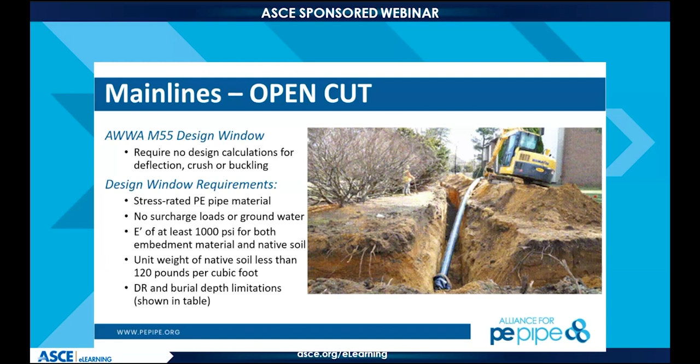So while some may think that this is not a safe way to install the pipe, it really is. There's a bedding. They'll come back through and backfill and compact that material with natural native backfill in this particular scenario as we go through.

Here, another way to install HDPE is with horizontal directional drill, which is quite oftentimes the municipalities' first introduction to HDPE, if they haven't used it before. They are continuing to push the boundaries quite a bit for HDD. We're seeing very long runs of very large pipe that are going in to be installed via horizontal directional drill. So some of the things that we're looking for is not exceeding the tensile yield force of that HDPE when we are installing it.

So we want to know about the friction forces and all those that are happening during that horizontal directional drill process. Earlier this year, we did do quite extensive discussion on horizontal directional drill and trenchless technologies in general. So definitely look at some of the Alliance's previous webinars in order to beef up on that information itself.

Another way that HDPE is often installed is through pipe bursting. Pipe bursting is a trenchless technology, and three things are happening at the same time: we're fracturing that existing pipeline, we're pushing a temporary soil cavity through with an expander head, creating space for that HDPE pipeline to come in and follow suit. So this is a trenchless rehabilitation method, and we will replace that existing pipe through this pipe bursting process.

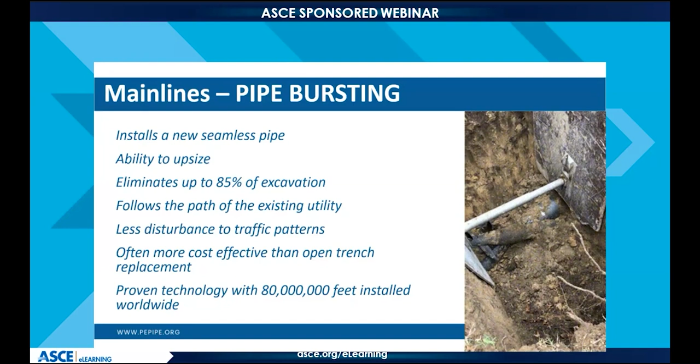Yeah, that was in Miami, just north of the airport. This was a sewer rehabilitation where they were leaching fairly excessive sewer into their ground. It was about 200 or 350 feet of pipe. They've been doing sections like that, 350 to 800.

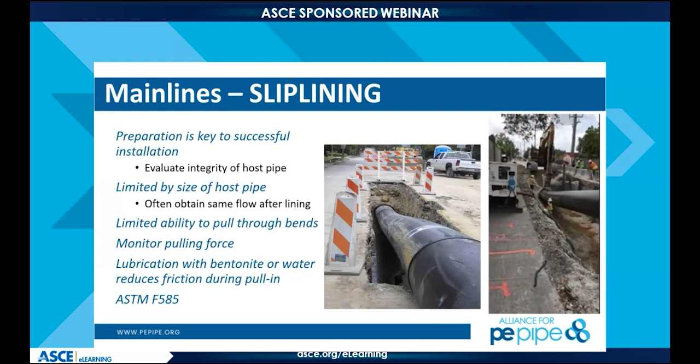It was really good. That long longitudinal run that we're looking at allows us to fuse a lot of pipe material in advance. We're getting a fairly good hydraulic improvement just from the smoothness of the HDPE pipe as we're coming through and putting that in. So in some cases, you don't necessarily need to go bigger if we're smoother on the interior of the wall as it goes through.

That relaxation period that we're looking at occurs in the first 24 hours as that pipe is allowed to relax and settle. Most of the relaxation will be in that 2-hour time period, but before you make any connections, we want you to let it be for a good solid 24 hours.

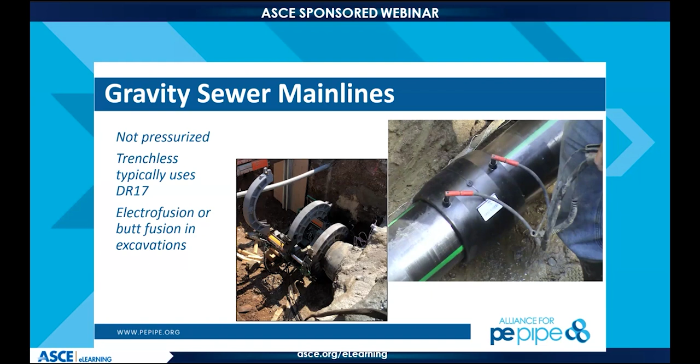So some things that are unique to gravity sewer main lines, a lot of times they'll use DR17 to install this. Of course, they're not pressurized force mains that convey material from a pump station to another location. HDPE is definitely a good product for these types of scenarios, as we're looking at trying to resist that hydrogen sulfide that is often released when we agitate that raw sewage.

So here's a project we just wanted to talk about fairly quickly, where HDPE came in and saved the day quite a bit. There was pipe failure in the Intracoastal Waterway in Fort Lauderdale. Since that was the single pipe crossing that Intracoastal Waterway, they had no other avenue to get the raw sewage across that waterway. So they were using 2,000-gallon capacity pump trucks, vacuum trucks, to take it from one side of the Intracoastal to the other.

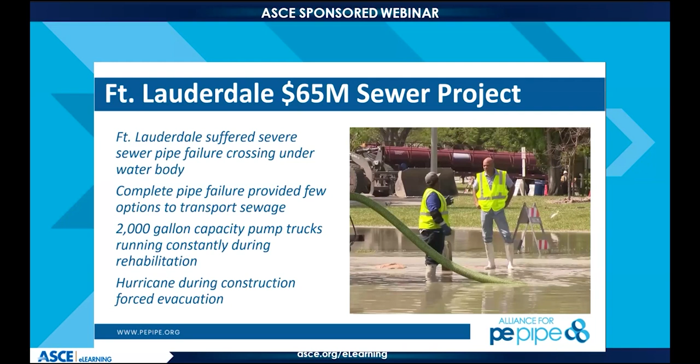This project itself used a design build process in order to expedite contractors to come through and use a myriad of trenchless technology methods to install new pipe and rehabilitate existing pipe in some scenarios. So HDPE was very good for this process, and it was definitely a rugged and durable pipe for what we're looking at.

So inflow and infiltration oftentimes plagues that gravity sewer, and this happens to be an opening within the gravity sewer system, either through broken joints or direct connection between the rainfall event and the gravity sewer, and it'll lead to capacity reductions, and that inflow and infiltration will take over valuable hydraulic capacity within the pipe itself.

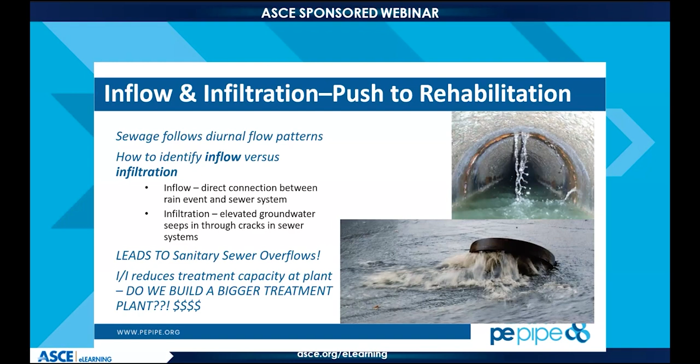These SSOs, sanitary sewer overflows, lead to consent decrees in many instances, which is a judicial order. That municipality has to go through and actually try to fix their system up in that scenario. So there are ways that we can look at our pump stations in combination with rainfall events to see if we have a closed system or if we are getting some of that inflow and infiltration.

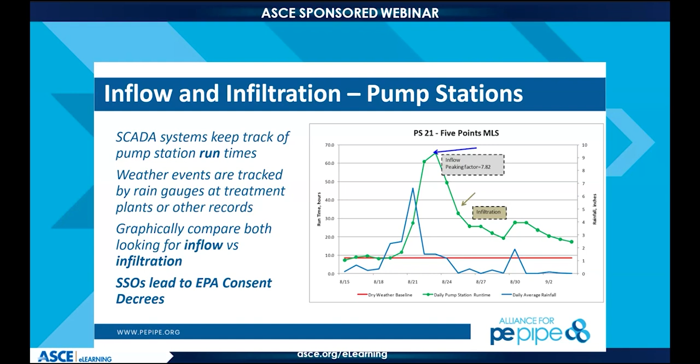So sometimes they simply put door hangers and have an outage period when they're performing the pipe bursting work, and it allows for you to be able to just bypass that one.

Yes, Pete. So we just had a great question, Alan, about whether or not you can pipe burst HDPE. You know, polyethylene is not fracturable, yet the city of Houston does a lot of it. Could you tell us whether or not we can pipe burst HDPE and what we need to look out for?

Yeah, absolutely. So you can pipe burst HDPE through a static pipe bursting process and a cutting head that comes through and simply cuts that HDPE, and then the expander head will push that apart as well. That's static pipe bursting. That's just a different type of pipe bursting, and how it applies the force necessary for the pipe bursting process. There's a hydraulic power pack, and that pushes the force, the brute force, across a series of rods or cable to that expander head as it advances and pulls through.

Pneumatic pipe bursting only uses HDPE as a replacement pipe method because it uses an impact hammer driven by compressed air and inches along with the existing pipe. It is aligned with the existing pipe through a constant tension winch that pulls that expander head through.

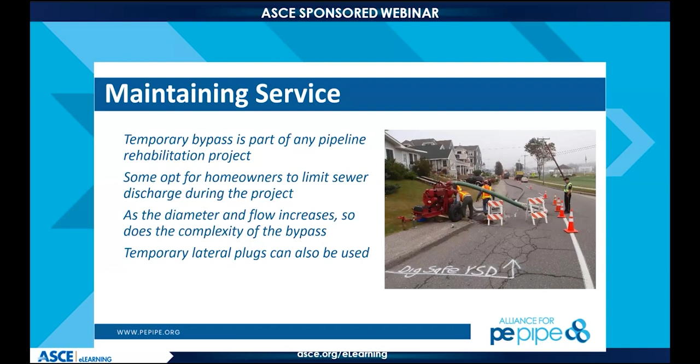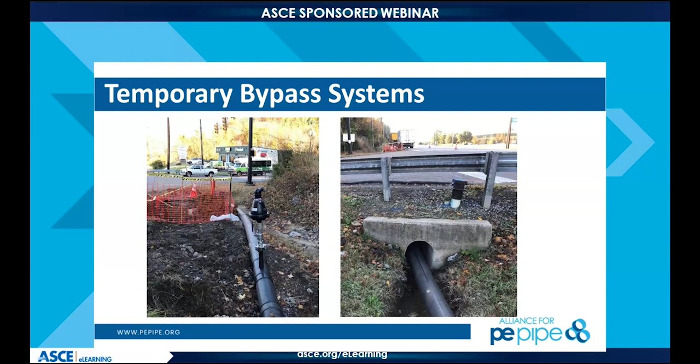Here's a very good example that I like to use of temporary bypass for the city of Baltimore. They were rehabbing the 78-inch combined sewer. So that has stormwater and gravity sewer in it quite a bit. So a lot of capacity through this pipeline, this 78-inch pre-stressed concrete cylinder pipe, and it was rehabilitated using cured in place pipe and carbon fiber reinforced polymer.

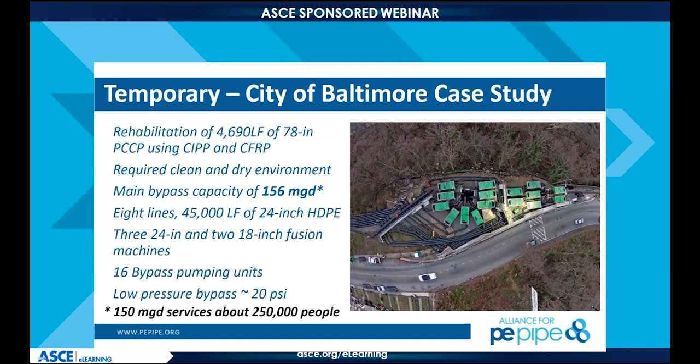Now, in order to be able to make the temporary bypass work for a pipe of that size, you needed 45,000 linear feet of 24-inch, and then lots of fusion machines, 16 bypass pumping units, and a lot of different parts and pieces to be able to get all of that to work. So HDPE is very often used for the very difficult stuff, and we're going to encourage you to use it for the easy stuff too.

So with manholes, there's lots of different ways to connect to that HDPE manhole. If you do have an HDPE manhole, they'll have a stub out on the bottom section of it where you're going to either electrofuse coupler, or you're going to butt fuse right to that stub out. For manholes that are not high density polyethylene, and we're connecting to it, if you're pipe bursting, you'd allow the pipe to relax before making that final connection. And then you would put some type of grout around that existing concrete or brick manhole to be able to make that connection.

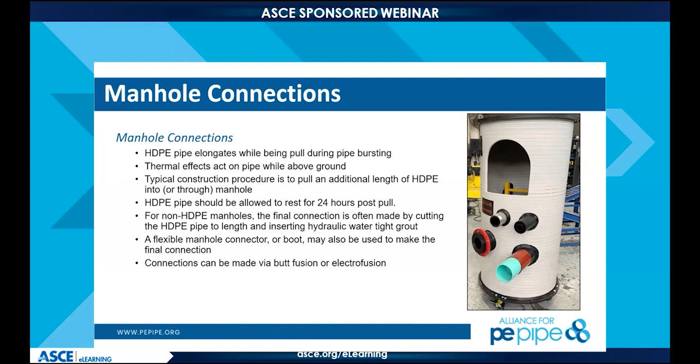But very often we do see HDPE manholes in very corrosive soil environments because it is corrosion resistant in that manner. So that manhole is necessary for cleaning and inspecting all the main lines as we come through. It gives us a chance to clean, jet any buildup or other debris within the pipeline, and then also inspect that pipeline afterwards. So here's just a couple more examples of an HDPE manhole.

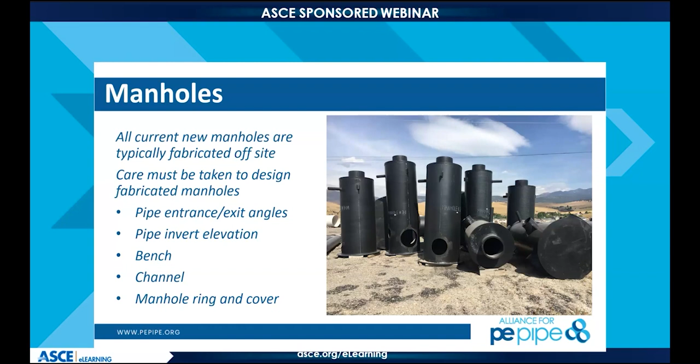So much like your precast concrete manhole, if you're putting a new one in, we want to know what the invert elevations are and directions, and you would tell your fabrication facility that information, and they'd fabricate this fitting for you in their yard. So Rusty and his crew have the capability to be able to do that for you.

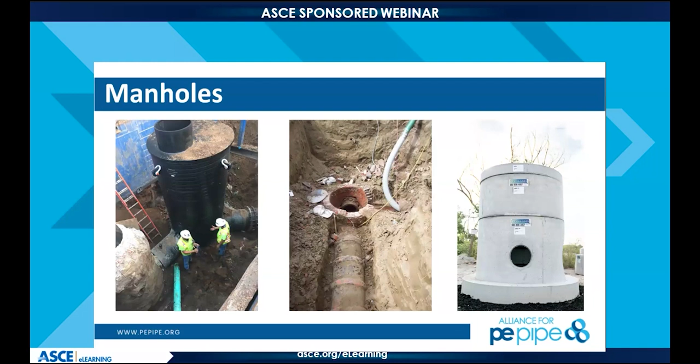So here's some examples of those installed manholes. The one on the left is in Beaufort Jasper in South Carolina. So they went with all HDPE manholes in order to be able to resist their soil with extreme corrosivity. So some of the things that the HDPE will help with is getting rid of that hydrogen sulfide, or rather being resistant to it.

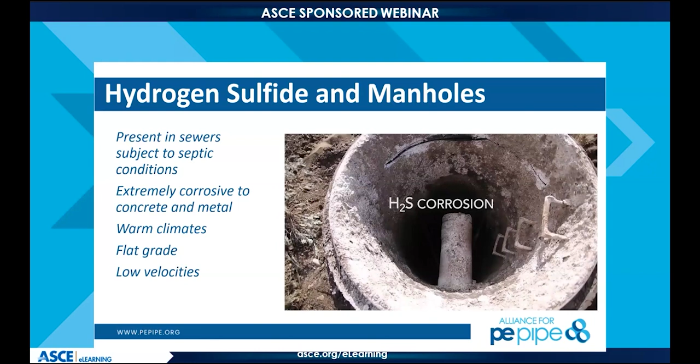And what you'll see here right in the middle is that concrete being eaten away directly by hydrogen sulfide as we come through. All right. Talking a little bit more here about air release valves, as we did before as well. That air release valve happens to be at a high point along the line where that gas is going to accumulate. And when we use an air release valve to let that out, then we're able to make sure that hydraulic capacity is not limited.

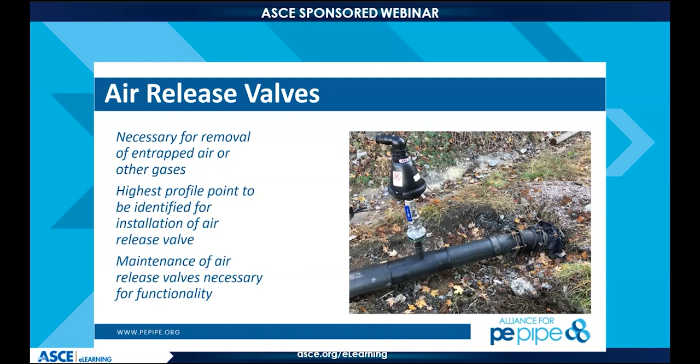Sorry, the Beaufort Jasper is in South Carolina, not Georgia. Thank you very much, Pete, for keeping me up to date here.

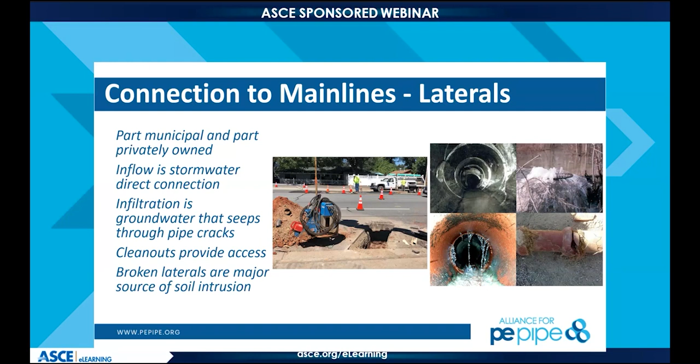So connection to the main lines, we're looking at laterals as well, and you can pipe burst some of those laterals, which you'll see here in the middle happens to be a small lateral bursting machine. If you've ever seen the Alliance at a trade show, sometimes we do bring pipe bursting to the trade show floor, and we use a lateral bursting rig like this. And just the same way that you burst those main lines, we can burst that lateral and bring back that high density polyethylene that we really like to see in that manner as well.

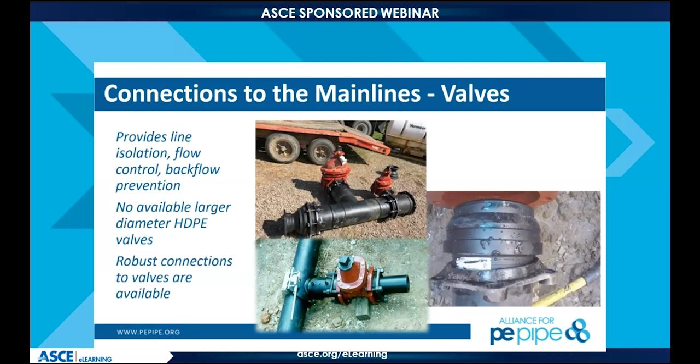Last but not least, that bottom picture is an electrofusion saddle that's connected to the mainline HDPE, and then it's with an electrofusion coupling. The MJ adapter is put on to transition to the gate valve there, and you can see in the video that's just a standard legacy mechanical joint MJ valve that all water systems have in their system.

Just showing you how we connect, and basically it works similar to, for those of you who know, a hydrant T or a swivel T in the ductile iron business. This is just a polyethylene version of that. So literally those bolts would all have to break for that joint to ever come apart. So it's really the Cadillac or Mercedes of connecting to other piping systems.

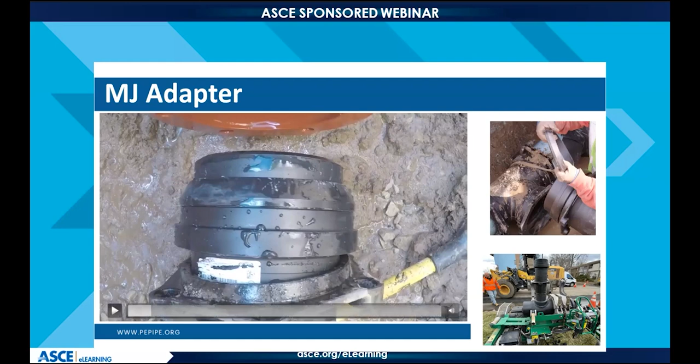So Steve, do you sell these mechanical joint adapters as kits or individual pieces? How does that process take place? We sell them as kits, but there's so many different options. I think this example shows the blue bolts, which are more and more common. Those are becoming kind of the leading spec. Bolts used to be just Corten steel. We still sell some of those.

These bolts are a little longer than your typical T-head bolts for a standard MJ fitting. So yeah, we mate those with the gland, so we get them the right length and the right material. Some specs ask for stainless steel. Personally, I like the blue bolts. I think they're the best for this particular option. But yeah, we sell those as kits.

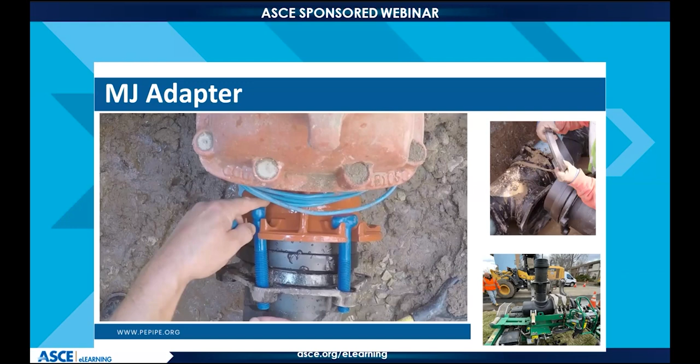Awesome. So the image in the upper right, the most popular video we have on YouTube is that 2-minute video that shows how to install an MJ. One thing I've learned, Steve, is up in Canada, the Megalug is still the standard that everybody uses. But we're starting to see more and more MJs making it up to these recalcitrant parts of the United States and Canada. But Megalugs work too, don't they?

They do. And the only thing I have against a Megalug, I guess, is that it opens it up to installation error, right? Is the individual that's tightening those bolts doing it properly? Is there anybody watching to make sure he's doing it properly? In this case, with the MJ adapter, I think the big advantage is that if that doesn't leak, then they installed it right. Yeah, for sure, kind of at leak test. But with a Megalug, you have to have a stainless steel stiffener inside it to resist the forces of the lugs as they're being tightened. And so there's just quite a few variables there.

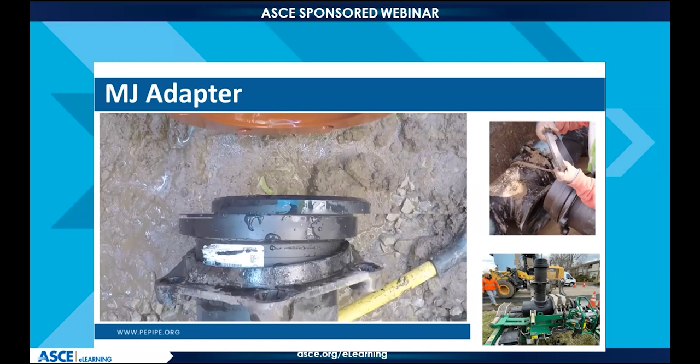If it's done right, it's a great joint for sure. So unique to both of those, the MJ adapter brings all of the force longitudinally through that fitting in its robust nature. The megalug then has force on the outside of the pipe laterally, so that way it squeezes on that stainless steel insert, and that's unique to each of the fittings. But they certainly both will work, and they have for quite some time.

So what are we looking at here, Steve? We're looking at, I think this brand is, an AVK gate valve. So this is a standard AWWA C509 gate valve with a different end. So, gate valves, they're the ones with the rubber wedge. They're the standard in the industry that every town in America uses. The most common one for a buried valve is an MJ valve, which are the ones we saw before. But AVK came up with this very unique connection specifically for HDPE.

And so they made the bottom of that valve, instead of a female end that is shaped like a mechanical joint with the bolt holes, they made it with a male end, and that's a barb fitting. And I love this video because it shows you how flexible and durable HDPE pipe is. So just with a whole lot of force, they're literally pushing the pipe over that barbed fitting. And then, as you can see in the right-hand picture in the lower corner, there's a stainless steel retainer ring that's then shoved over the top of the polyethylene pipe to lock it onto the valve.

So that valve is then wrapped in, I forget the name of that wrap, but so it doesn't corrode. So you've eliminated the bolts, and you've fused this valve into your system. So you've gotten rid of all the corrosion points because that valve is epoxy coated, and in this case, the stem is stainless steel. So the fittings portion of the HDPE industry has developed a lot of these types of products to really just make it so much easier for everybody out in the field to use that high density polyethylene.

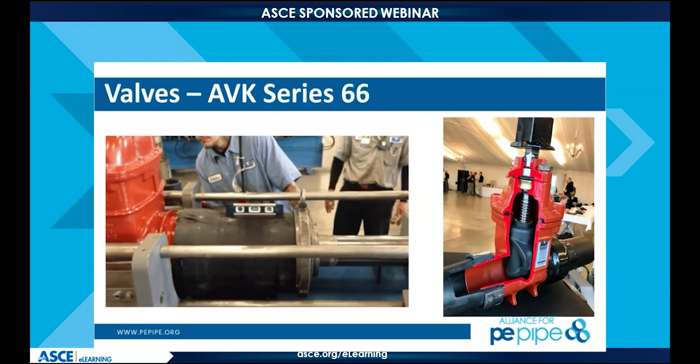It's also important to note that the two pipe materials have very, very different temperatures at which they're brittle, and that ruggedness and durability of HDPE to work with in the field is one of those real saving graces for us. So I'm going to keep going.

Fire hydrants provide a lot of different uses within the system itself. We can use them to flush out poor water quality, either through a reactive flushing program or a unidirectional flushing program, in which case we're going to look to directionalize those impurities or whatever is contaminating the water supply, such as old water, iron, or other things like that that get in there.

So we can use it also for pressure monitoring or temporary water for construction. And here's just a few examples of those as well. That AVK valve also has a stub out for a fire hydrant that we'll be looking at as well. So lots of good uses besides just firefighting. You can control and learn about your operation of your system in that way.

So tapping the main is what we're here for, really to talk quite a bit about the service connections when we get to it. Here's some examples of tapping a main that is not live. There's a big difference between hot tapping, which is there's water flow within that potable water main as we get through there. And we'll show you later on some examples of fittings that can be used to do that tap.

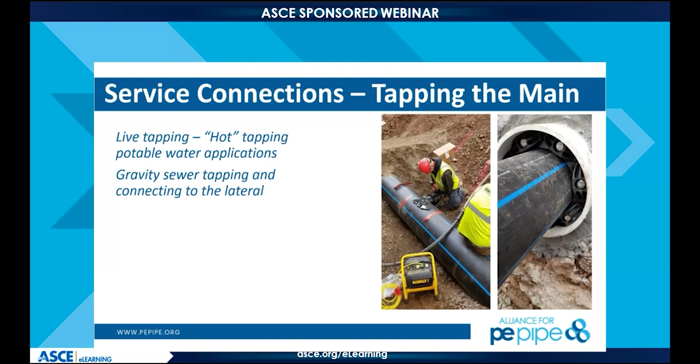So here they're making a larger fitting onto the side of the pipe and then prepping this service connection, larger diameter, that goes into a larger building in Minnesota. And then others for gravity sewers as well. So here we're looking at small to medium-sized services, metered usage.

So there'll be a corporation valve that allows you to shut off that lateral or service connection as we come through. It is there sometimes to prevent that cross-contamination through that line as well, and compression fittings can be used for those smaller service lines. So here's some examples of corporation valves.

So unique to HDPE, you can't put the threaded connection in directly to the HDPE. It has to be done through a fitting, and we've got plenty of fittings that'll accomplish this for you. The taper pattern on some of these different corporation valves varies fairly significantly. So there are multiple different types of fittings with a different taper on the end of that ball valve that you want to make sure that you're getting for the right use in your system. It varies across the country from place to place.

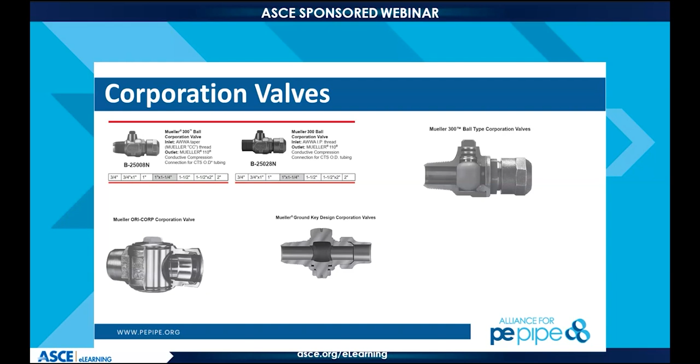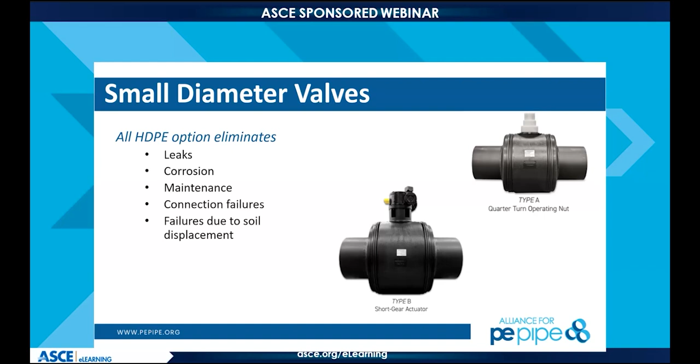So here are small diameter valves that are made of high density polyethylene with some polypropylene elements inside of them. But you're going to see that these are all corrosion resistant, leak free. In some instances, we can just simply butt fuse that right to the service connection as well. So we like to be polyethylene from point A to point B. It's a monolithic, fully restrained system, but we do recognize sometimes brass fittings are necessary, and that's what you're more familiar with.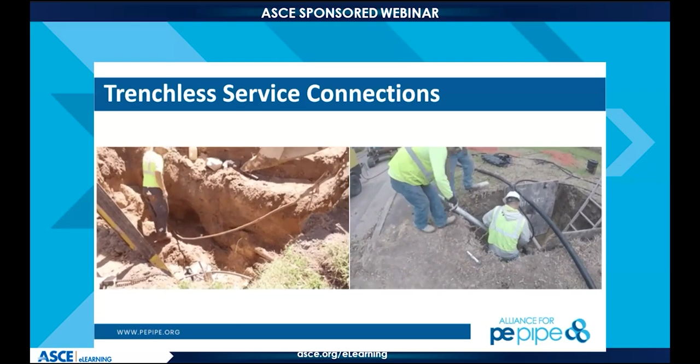Here's some trenchless service connection installations. What you're seeing on the left happens to be an existing copper service, and they simply attached the high density polyethylene on the other side, and are using brute force to pull it out. What you're seeing on the right is a pneumatic insertion tool which they'll line up to cross that road for a long side service connection in this scenario. So that is a trenchless installation tool. It is not an intelligent tool, so you can't directionalize it, but if you get it in the right direction, you can have that set up in there.

So Steve, you want to come on and tell us a little bit more about what we're looking for in service connections, and share some of your history and the things that you've done in the field? Yeah, so what you're seeing here is quite a few different options of service saddles. The one you see there, kind of in the middle with the corp stop threaded into it and the brass threads, that's an electrofusion saddle that's just electrofused to the outside of the pipe. And then the threads are AWWA threads, so they mate with that corp stop, and that's very similar to every other service saddle that exists on any other kind of water main.

So sometimes today in ductile iron communities, they still tap directly into the wall of the ductile iron, but many municipalities have gone to mechanical service saddles, which we'll show in a minute. But kind of the evolution from that one with the brass corp stop in it is the one just below it, which is also an electrofusion tap saddle, but it has the cutter built into it, so you don't need a tap machine. That's why they call it a tap saddle. It's a built-in tapping machine, built into the saddle. And there are literally millions of those in the ground in the industry, in gas systems. So we just took a product that's been put in the ground since the 1980s in gas systems and copied it.

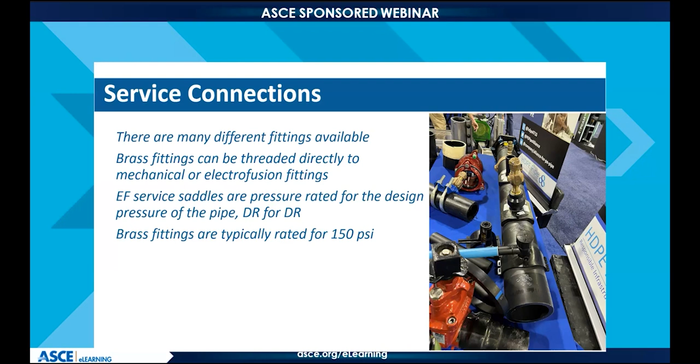Our manufacturers just do the same fitting, but do it in black HDPE for waterworks applications. There's again a corp stop into an electrofusion saddle. In this case, if that was a live tap, you would have to hook your tap machine, like you do traditionally with PVC and ductile, to the back of that corp stop. You would open up that valve.

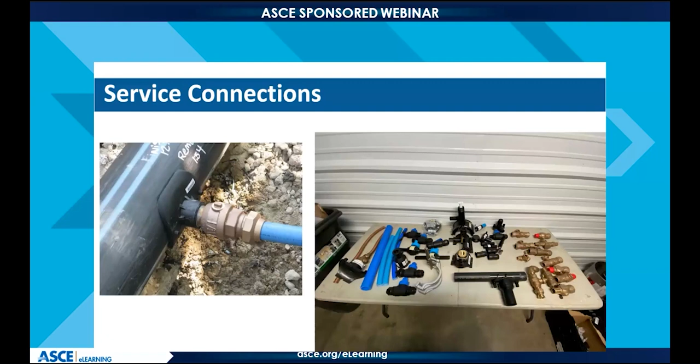The cutter head would go through the corporation stop, cut the hole in the main, and then you would back your tapping tool out of that corp stop, shut it off, and then you would attach what looks like polyethylene service tubing that goes on to the house. Or in this case, it looks a little larger, probably a commercial building.

Yeah, so thank you for that, Steve. Now we're going to cut to a little more detailed conversation of that with a live presentation by Alan in our studio, where he's going to talk through best practice connections to the main.

Alan, take it away. Hey there, can everybody hear me all right out there?

Perfect. So we have a great service display for you here. What we're trying to accomplish here is like what we would do in a road show, where we bring 10,000 pounds worth of gear to wherever your location is, and then you can touch and feel it and see all the parts and pieces.

So we did a myriad of different ways to connect to the main, including on this side a flange adapter that would connect to some of those valves or change in material types, and an MJ on the other side. So this is a self-tapping electrofused saddle. The bottom part of it only straps on while we're fusing it, but you'd fuse this directly onto the HDPE.

And now this is one of those that I was talking about, this live tapping. If you can see this, you could see the cross section of the cutter that goes through. And as we operate this, that cutter will go down and cut to the outside of the high density polyethylene and hold that coupon for us back in through this apparatus.

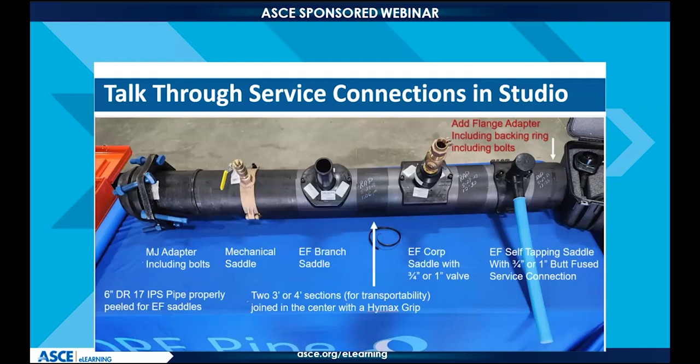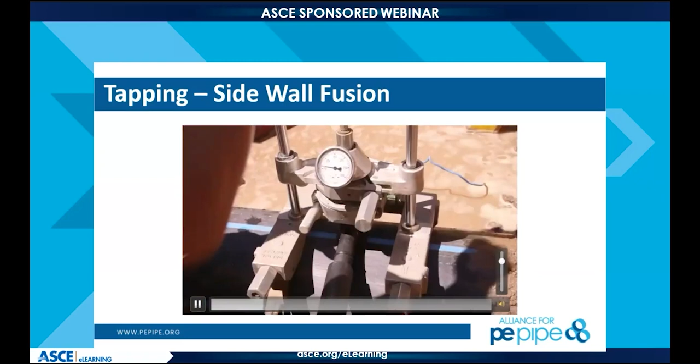One of the questions we just got, Alan, was: is sidewall fusion still active in the municipal water market? And as I said in the response, yes, it is, but, here's an example of it, Alan, thank you, it's been taken over by electrofusion. The electrofusion couplers and saddles have become much more complex, much more prevalent and better products. And our understanding of how to teach electrofusion and make sure that the specifications cover it adequately has gotten better.

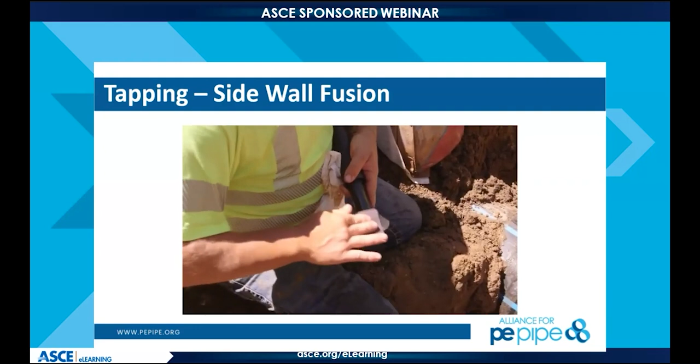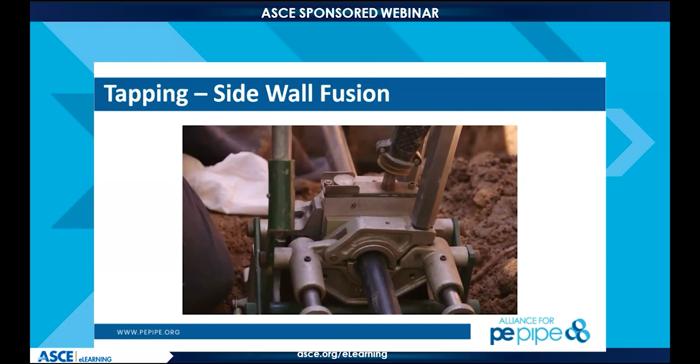So electrofusion has become, in Europe, Alan, even more common than butt fusion. So it just kind of depends where you are in the world on what is the most common. This sidewall video that I shot was shot up in Austin, Minnesota. They do a lot of sidewall fusion. And right now we're butt fusing the service connection to the outlet of that saddle. Alan, take it away.

Okay, we had a great question that we really want to bring our experts on. So Steve and Dave, if you want to come on video, we can have a direct answer to this question. Do you have to be cognizant of where you place your tap service connection, i.e. a certain distance away from a fused joint on an HDPE main?

You know, we kind of recommend if you're 3 diameters away from the fusion bead, the evidence of where the joint was, you're more than safe there. I mean, that bead or that joint, once it's been butt fused, is going to be stronger than the pipe. But that's just a rule of thumb that we stick with for a lot of cities.

Okay. It's also important to note that in the presence of an HDPE fitting, our allowable bending radius comes to 100 times the OD of the pipe, as opposed to just regular pipe, where it'd be 25, depending upon the DR ratio of that pipe as well.

So good, we're going to keep going through it, and we'll get to some other information pretty quickly, including pressure testing. So what are we looking at here for guides for electrofusion? Steve, we've got the MAB-01 and MAB-02, and they'll give us really good guides as to how to properly do electrofusion, correct?

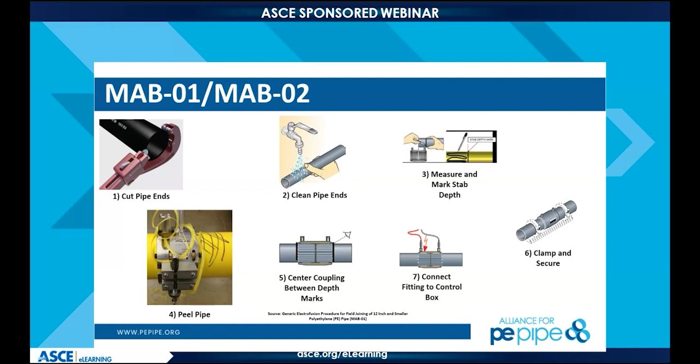pipe itself. And the MAB took those standards that were all manufacturer based and made them generic, so we can all refer to them as the standard in our industry. So I'd just like to reinforce that when we get to virgin resin material, so this process and procedure peels that oxidized layer away, which is what Steve said, all of the fusion process is the same. So it's electrofusion, butt fusion, extrusion. They're all removing that potentially oxidized material and then just properly prepping it that way.

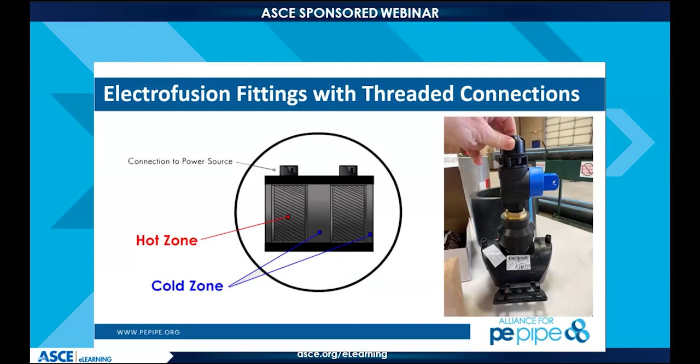So these fittings that we've shown are manufactured with those wires within the actual fitting itself and move from that hot zone to the cold zone, as Steve had discussed. So that's just another example here for you to be able to see it. We're going to move pretty quickly in some of these. Here is a video for us on how to prep that external surface as well.

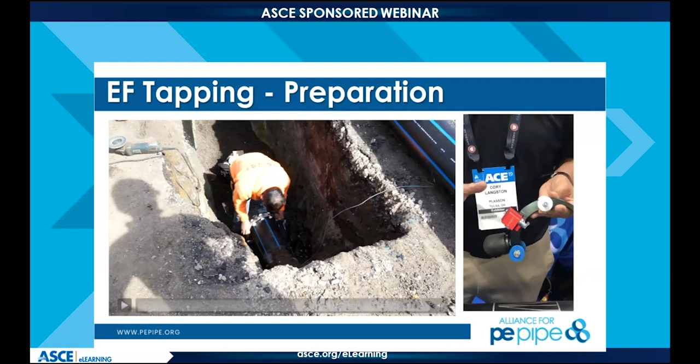Hi, so I have the new Plasson U peeler. This is a size-specific electrofusion peeler or scraper. You'll see the cutting blade is right here, and it's set up on a spring so that as I push on it, it will automatically adjust to slight imperfections in the pipe if it's a little bit oval or out of round. And it does a really nice job of getting you a good even peel to prepare your pipe for electrofusion. There we go. All right, so I'm going to show you how this works.

And here we see on the left a larger pipe application as they're moving that around, prepping in the actual excavation itself. So yes, these tools are intended to be put into excavations for you to be able to properly prep that surface as well.

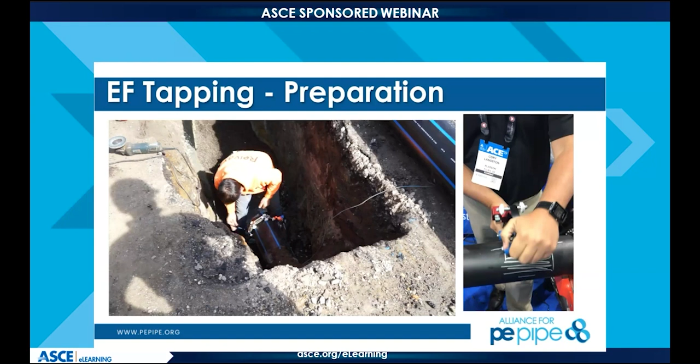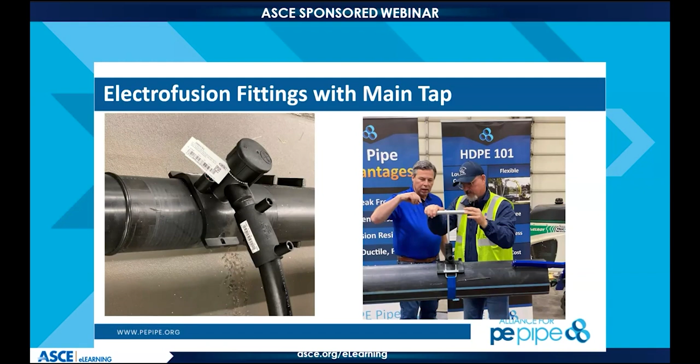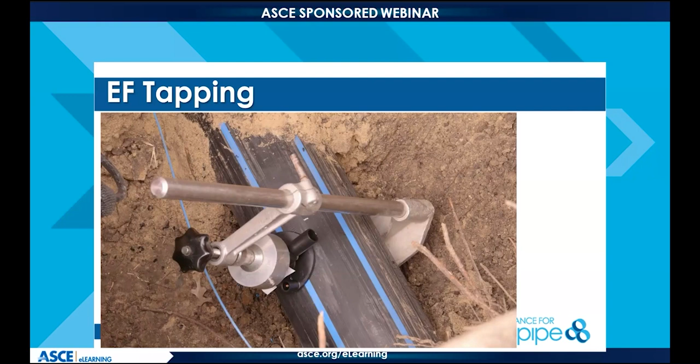Oops, here we go. Here's some more examples of the fittings that we have. The one that you see on the left here has an electrofusion coupler right off of the self-tapping tee as well. So we've seen quite a bit of these as we're moving forward. Here is another example of electrofusion tapping, simply a different style of fitting and a different style of tapping device to be able to provide that connection. So here is another example of that electrofusion process. So there are lots of tools available.

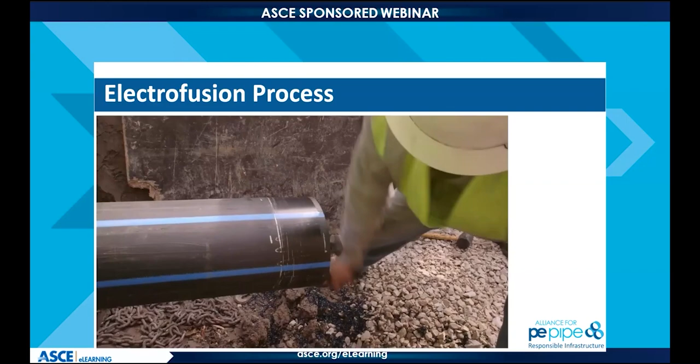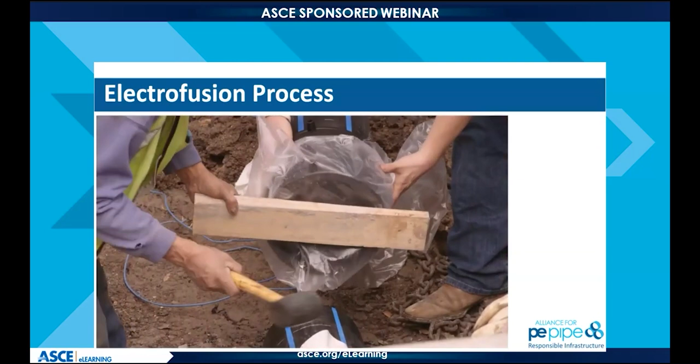Rusty and all of his guys have these available for you for rental to teach how to do that, or for you to buy it and do it yourself as well once we get through that whole process and properly do the electrofusion as we're seeing here. Rusty, you want to come on and tell us a little bit about some of the offerings and how one might be able to contact you and figure out how to rent the equipment that way?

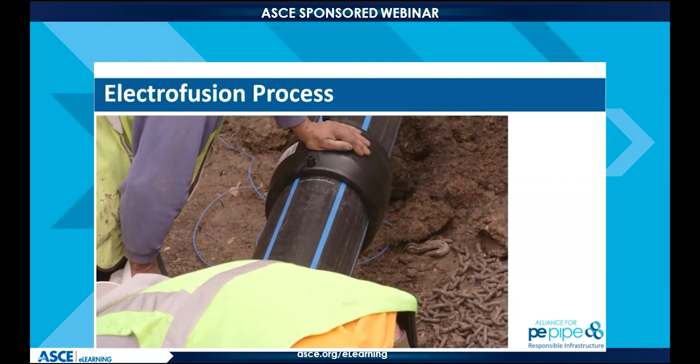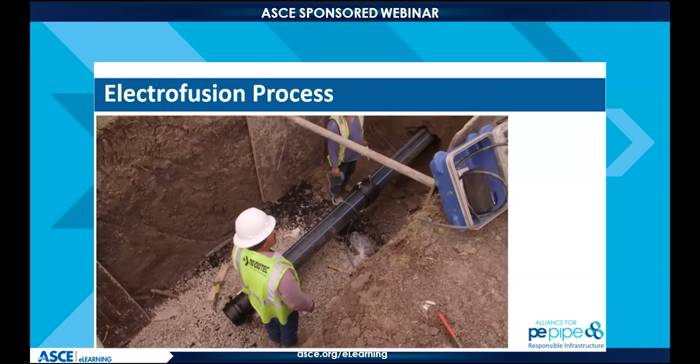But we really, again, we offer fusion machines for rent. We also have them for sale, stocked new or used. Try to accommodate you whichever way you would care for. Long-term rental, we could even look at maybe providing credit back or something like that if you decide to purchase the machine. We also have the same thing for all of our electrofusion boxes as well.

Definitely want to try to kind of zero in on what brand you prefer and that type of thing. But the boxes really work on any coupler. With the couplers, it's not just the connections. Again, like we've talked about, electrofusion service connections, as well as L's, T's, or anything like that for electrofusion. It is pretty good for the smaller diameters for sure, or dropping down into the trenches. We do talk about a lot of trenchless applications. We have in-trench fusion machines that can do tie-ins as well, all the way up to 63-inch, and can drop in and do tie-ins. So again, happy to work with you however you would like.

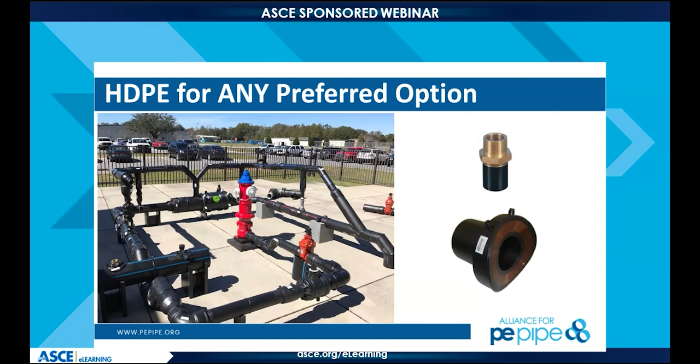We used to haul this all around and set up the pipe display, which would take a long time as well, to be able to show just the myriad of different options for replacing or using HDPE. Here's some fittings and cross sections that we've shown. And here, Pete loves to get these types of videos going. Pete, you want to come on and tell us what's going on here, what we're looking at?

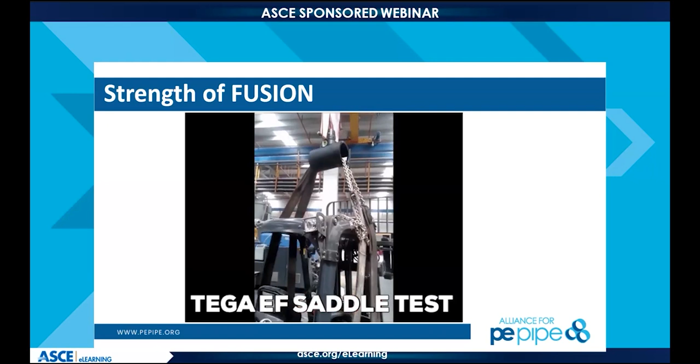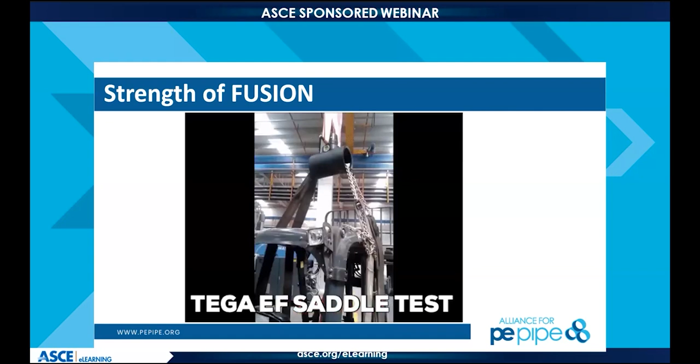Sure, we got this one from our friends at Strongbridge. So this, we're lifting up a lift truck in the air with all the weight on a Tega coupler. So a chain is not a best practice, obviously, to pick up something heavy, but at the top of that piece of pipe is a saddle that has been electrofused onto that piece of pipe. And that pipe is going to fail, Alan, before that electrofusion saddle does. Great example, kind of fun to do something like that. It's not scientific, but it certainly demonstrates the strength of a properly prepared electrofusion saddle.

Awesome. Okay, so I feel like we're really getting to a complete show here that there are just so many different options for you for your service connections. As we've seen, HDPE does work with the compression fitting. Now, these compression fittings are often not rated more than 150 PSI, but here you'll just put it right on the HDPE pipe in whichever mechanism you want to use that way as well.

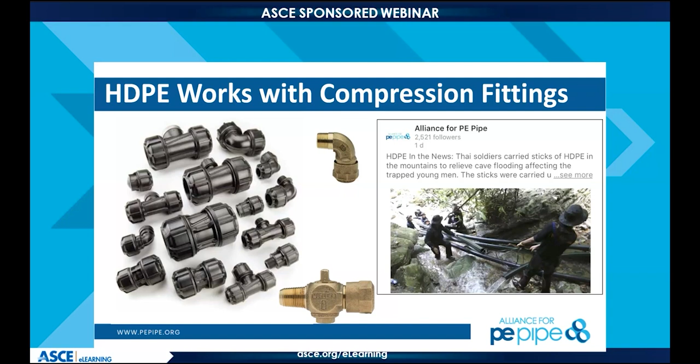So pressure testing is our very next presentation here. And Dave, you want to tell us a little bit about how we would pressure test the pipe? I'm looking at ASTM standards here to be able to provide that guidance, F2164, and you've done a great pressure test for us and walked us through in other applications, so feel free to take it away here. Well, thank you. A little bit of a passion of mine is to help engineers understand how to pressure test this pipe. And again, if you look at the designation there, it's the leak testing of polyethylene using hydrostatic pressure. As Richard will tell you, the pipe is pressure tested at the factory, right?

When they do a quick burst test, it typically won't be less than 3.2 times its pressure rating. So 200 PSI pipe would be over 650 PSI before it actually bursts. Once we get out in the field, though, we want to make sure that there are no leaks, either at the fusion joints or at the connections to the other components of the system.

So it's important here to set your test pressure at something that's reasonable. You don't want a test pressure that's any higher than the lowest rated component of your system. So even though you might have a 200 PSI pipe that could test at 1.5 times, at 300 PSI, it might not be a good call to put your valves and your hydrants against that kind of pressure. So typically, for a 90 PSI service system, we're going to test at 135 PSI.

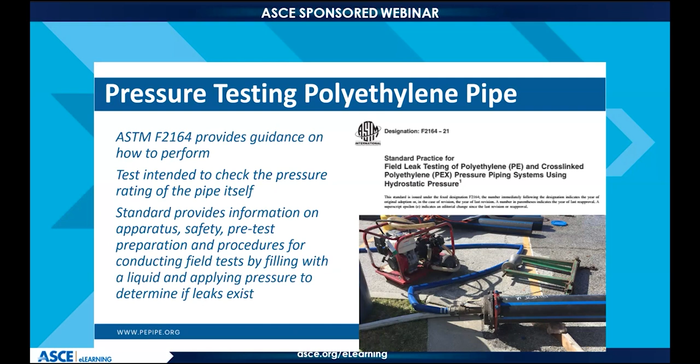We do have a little different process because polyethylene pipe expands and contracts due to heat, thermal changes, and pressure changes. We do need to prepare the pipe. When we fill the pipe, we fill it slowly, never more quickly than we can vent it. We don't want any air trapped inside. We let the temperature between the pipe and the testing liquid equalize, and then we pressurize it, get it up to its test pressure.

We're going to notice that, even when we can see no visible leaks in the system, that pressure will drop. That's because the pipe is reacting to thermal and pressure changes. So we'll watch it drop, add makeup water, watch it drop, and that can take as much as 4 hours. Typically, I'm finding about 1.5 hours. So unlike ductile and PVC that go right up to pressure and just stay there, this pipe is expanding, reacting to those changes. Once it becomes static just above the test pressure, at that point we're typical to any other kind of pipe test.

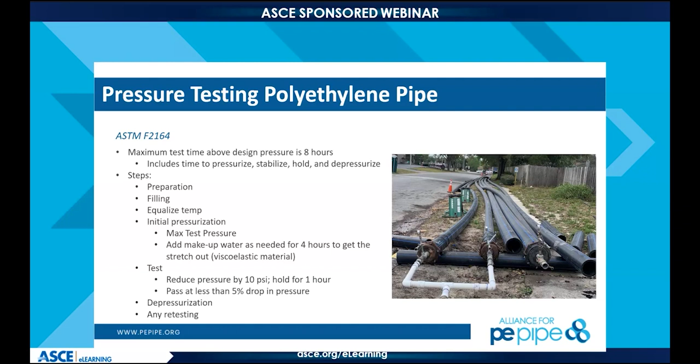We're going to reduce the test pressure by 10 PSI, hold that for 1 hour, and a passing grade would be anything less than a 5% drop in pressure. We do want to depressurize slowly. We don't want to create water hammer in the pipe. And if any retesting does need to happen, say we've got a leak in a valve, then we will let the pipe relax for at least 8 hours and begin our test. We typically prep for these tests in the afternoon, let the medium sit in the pipe overnight, and test first thing in the morning when the pipe is coolest.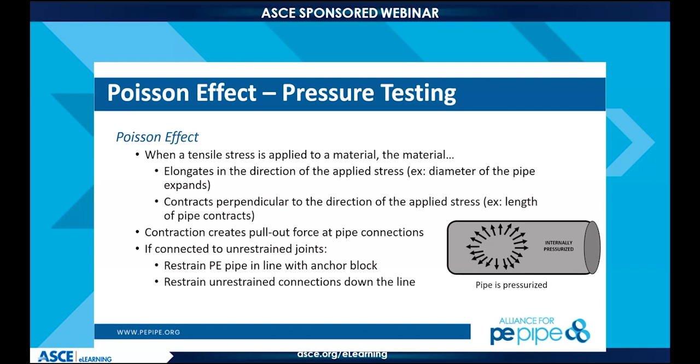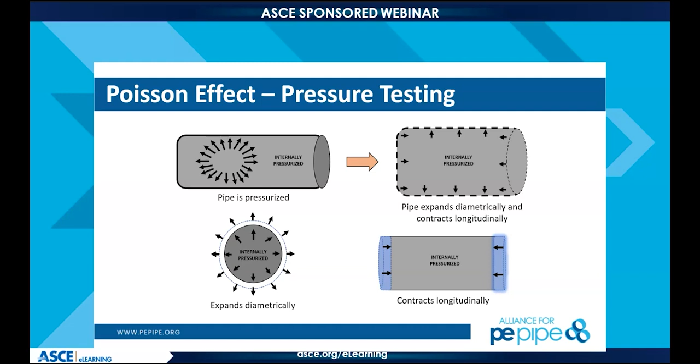Yeah, absolutely. So that expansion that you're talking about happens to be Poisson's effect. As that pipe is pressurized, it just slightly expands, because that material has to go somewhere. That's the Poisson's effect, in addition to the thermal effects. A thermal effect would be that pipe underneath the hot sun, and that expansion would go as well. But part of the pressure testing is we would actively look for leaks, and that's something that would obviously be seen in that process too.

So Dave, you want to tell us a little bit about what we're working with here while the video is running? Yeah, I've connected a data logger, which is the same machine that we use to record the times and pressures used in a fusion joint, to a pressure sensing port on the sample I've created here. It's a 6-inch pipe with MJs on both ends. There will be a cap with a testing port put on each end, and we'll fill this up until we get to our test pressure.

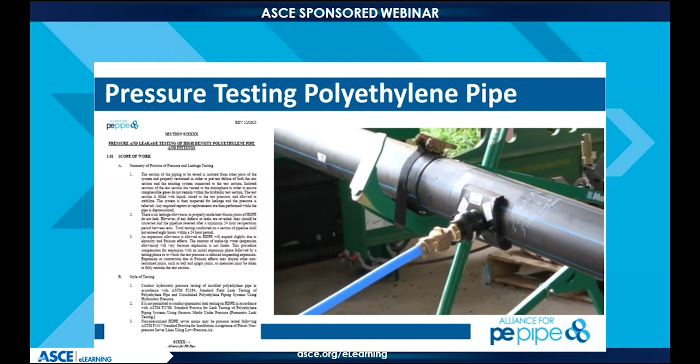You'll notice that we do want to be able to vent air out of one side. On the left-hand side, there is a vent, so as we fill, we can vent the air out. Any trapped air will cause variations in pressure, because we can compress air, but we can't compress water. So they act very differently to pressure. Any trapped air is also potentially very dangerous in the system, so we want to make sure we're completely vented. And that's the vent right there.

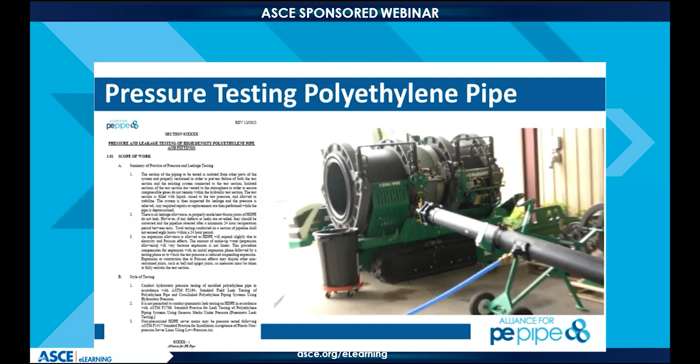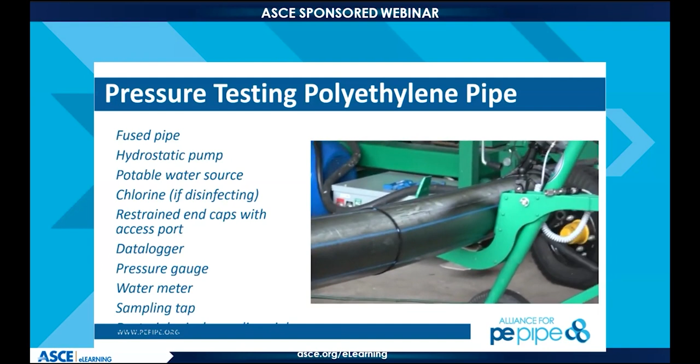So here we're looking at the end cap in a little better detail, and then purging of all of that air. We'd see that by all the water now flowing out of that pipe instead of air. We want to make sure those end caps are very much secured through that process, and not coming off from whatever pressure we have within that pipeline. So a lot of good tips here on how to do a good, safe pressure test as we pump through. And yep, Pete, you got something for us?

So Alan, one of the key differences between pressure testing polyethylene and other materials is we're doing this above grade, right? Compared to other materials, you're doing it below grade. What are some of the things when you do a pressure test like this that you got to be careful of with above grade testing?

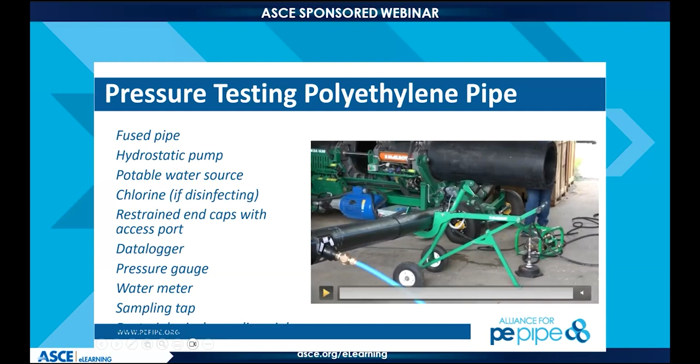So that thermal expansion and Poisson's effect, as the expansion can sometimes have the appearance of makeup water added to this pipe as it's pressure testing. And then also we want to make sure that those end caps are secured on that pipeline as well. So you'll be filling it. We'll be making sure that it's done safely as it moves through. And that is definitely a unique aspect of polyethylene versus other pipe materials as it's installed. So here, we'll keep moving. Dave, you got something else to add?

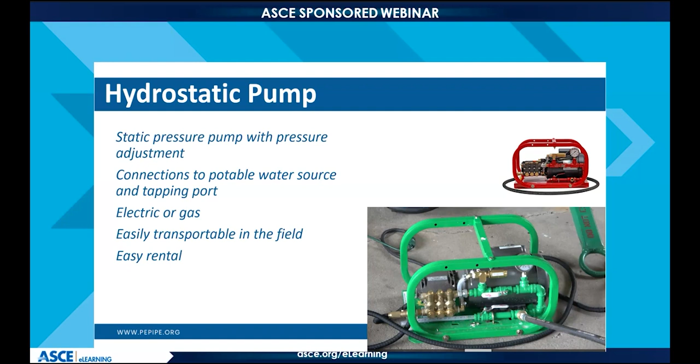We are using a hydrostatic pump there, which controls the maximum output from that. So we've got water going in, but only a certain pressure could leave. So it prevents us from over pressurizing that pipe and creating any sort of dangerous situation due to over pressurization. Oop, yep. So let me move to the next one.

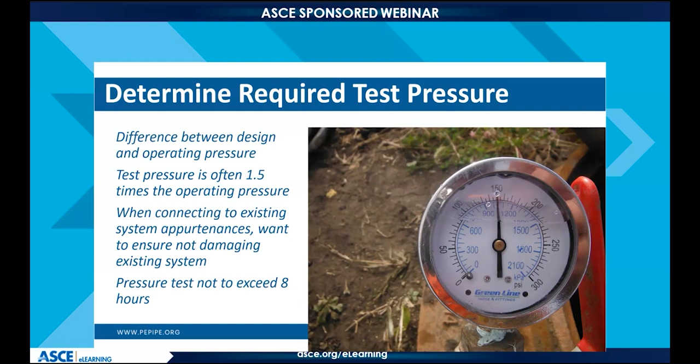It was important to note what Dave had talked about with the differences between a design rated pressure of the pipeline and then the operating pressure that we're going to be testing to. So here's just a little bit more support on that topic itself. That was definitely a good topic of conversation. But what are we looking at here, Dave?

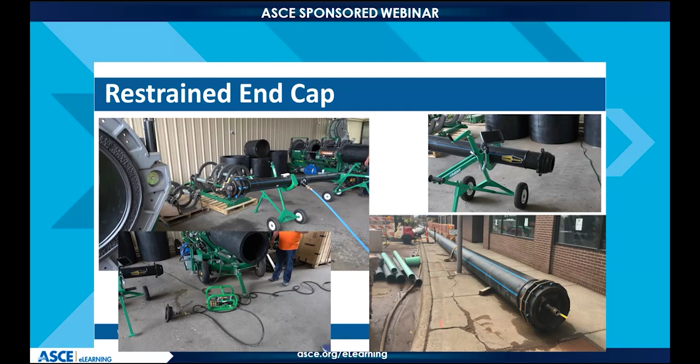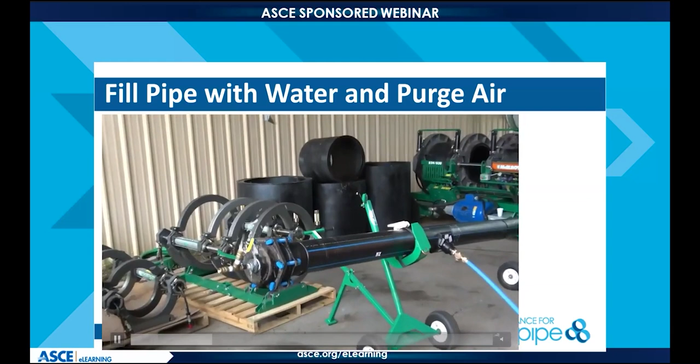So, yep, Dave hit on a really good point there. And as that pipe gets bigger, the logistics of being able to install it, pressure test it, all get bigger as well. So you'll definitely need to have a good solid water source when we're getting into much larger pipe to be able to provide what we need. So here's just the general process itself as we're finishing up with this test and purging all the air from the pipe. That's a good indication for us.

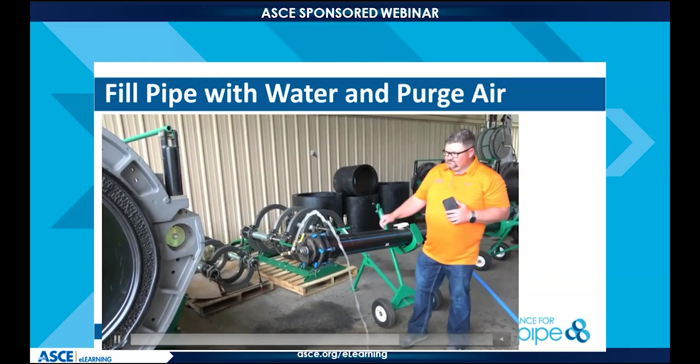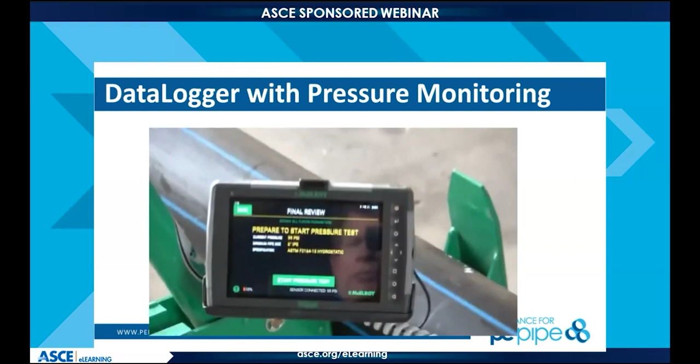A lot of times in the field, two workers can fuse up 500-600 feet in a long run, many times over during the week, and then conduct all these pressure tests at that same time as well to be very, very productive. So here's just another video of that pressure test monitoring through the McElroy data loggers. So it does tap right there and gives you that pressure as we're coming through, and just still more information for you here, showing exactly how to do all this stuff with the tools that Rusty and their crew really have.

So at the same time that you're doing some of these pressure tests, we can chlorinate that water and provide disinfection or proof of disinfection. So that process sometimes is called the pre-chlorinated pipe method, as to which we're making sure that the interior of that pipe is fully disinfected. And this gentleman I've got on screen here is from the Tulsa Department of Health, and we were both very happy and pleased that this pipe was in fact disinfected.

Aaron Davey was taking the sample with us, and then once we drain that pipe, we do have to dechlorinate that pipe and any of the water coming out of that pipe through it. We use a sample of dechlorination tabs, and then that'll do what we need to.

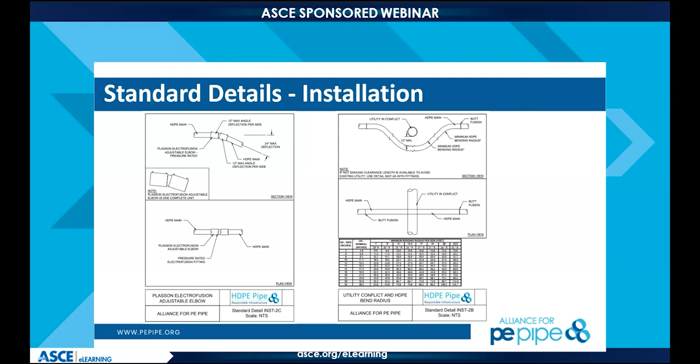Alan, good comment from Jason LeMay, our good friend in Lincoln, Nebraska, mentioning the importance of timing of that above grade pressure test. He recommends early morning. Exactly. That way that hot sun isn't beating down on it too much, and making sure that you don't expand that pipe as we go through. So love to see our fans of the Alliance for PE Pipe webinar materials coming on and helping make sure that we reinforce all of these good points for you.